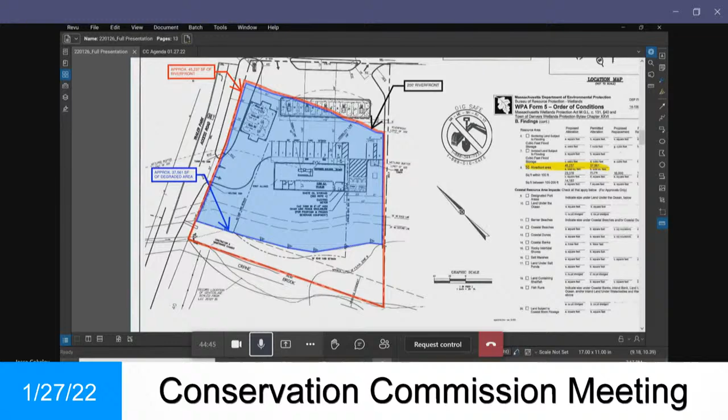The existing as-built plan, the existing conditions, pretty much matches the proposed layout. Building's in the correct spot. The trash enclosure is on the right-hand side of the building. The access drive is where it's supposed to be on Avalon Bay Drive. And the gasoline fuel pump is there.

But what is not there is the fully established plantings that were meant to be maintained. The invasive species have really grown in there. The prior operators were, I guess, dumping some things back here, some debris. It's become a little bit of a garbage area, and we've added a couple photos, which you'll see on the next slide. Photo 1 is from the rear, the southeast corner of the building, looking west, and photo 2 is kind of at the southeast corner of the building, looking south. Just to give the commission a flavor for what's out there.

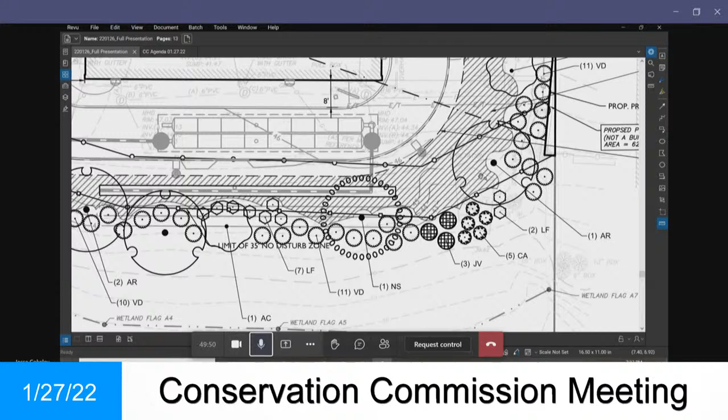Then the next slide that I have is the proposed landscaping plan, which also shows some of the site grading and stormwater improvements. So the improvements that we are proposing, one is to clean up that existing trash and debris. It does require us to go into the 35-foot no-disturb zone and the no-build zone to actually take those asphalt piles out. You can kind of make it out in this corner.

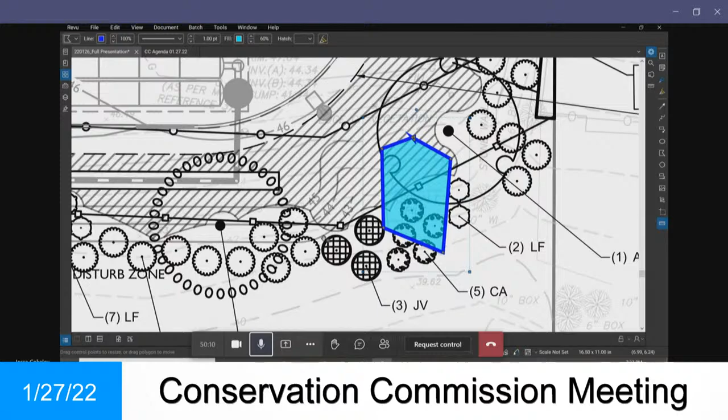So that is the area where the current asphalt pile is. Cleaning that up and then installing the drive-through lane and providing some water quality mitigation as well.

There were some discussions at the original informal appearances we had with the commission about how to best do that. We ended up designing the drive-through lane with a couple of curb breaks along the southern curb, which would allow the water to flow over into a grass area and then into an infiltration trench, which would provide additional water quality benefits. Then it would go into a perforated pipe and into an underground system to mitigate any peak flows, and then tie into the existing stormwater system and discharge at the existing outflow point.

So we're not creating a new source of stormwater discharge. We are maintaining and reducing the flows, and we are providing additional water quality benefits as a result.

Additionally, we'll come back to Kevin to talk about the plantings, but I did want to show the graphic to the board based on the question for that 5.5% disturbance. So here is the same plan, essentially.

We just removed the plantings for clarification's sake, and the colors on here align with the requested legend that is in the Danvers regulations and bylaws for the wetlands.

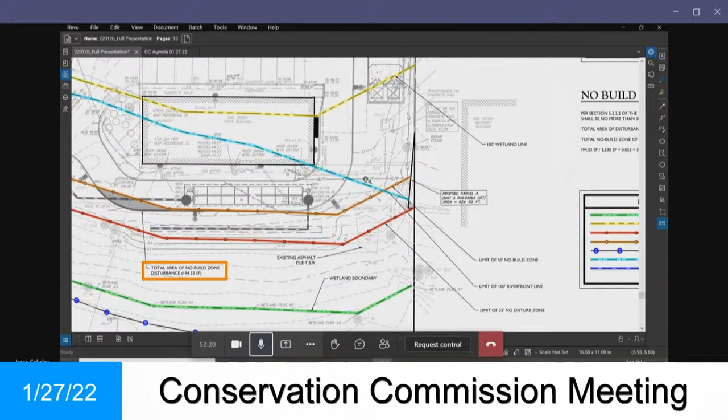We then have the 100 and 200-foot riverfront lines in the two different shades of blue. And the gray hatch here represents the approximately 195 square feet of disturbance in the no build zone.

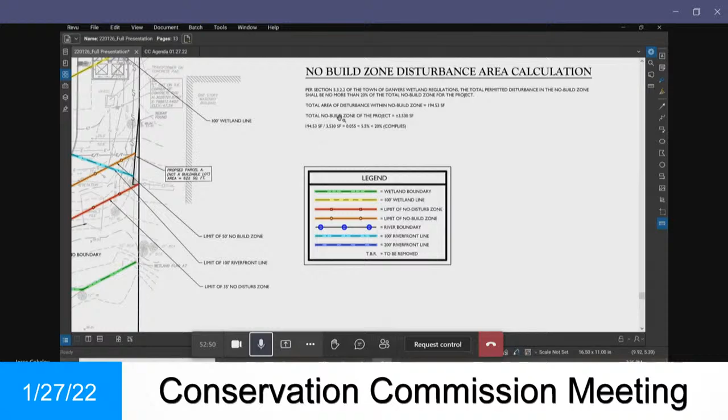We do provide a calculation on the plan. Per the regulations, a waiver can be requested up to 20%. The total no build zone of the project is about 3,500 square feet, so our proposed 195 square feet represents about 5.5% of that area. So that does comply with that total amount of disturbance in the no build zone.

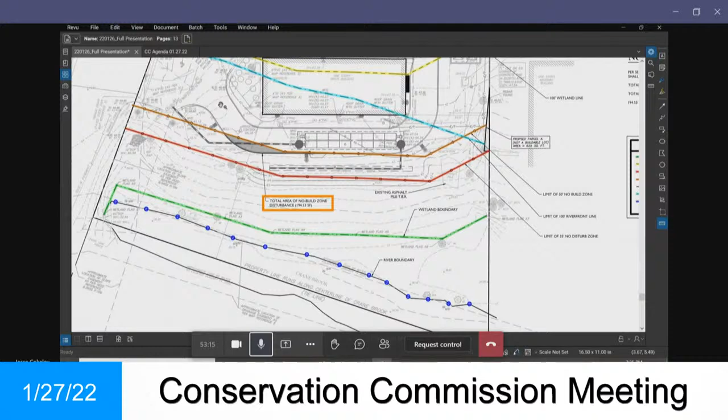So I will go back to the page here with the plantings on our landscape plan. One thing to note is we do provide some seed mix here, and this will be at a mild slope right around the drive-through lane itself. Obviously, we want it to be somewhat flat for water quality purposes up to the infiltration trench. And then we have some proposed grading there, and the plantings we are proposing should also provide some slope stabilization in that area as well.

I'll turn it over to Kevin to talk specifically about the plantings that were selected and their purpose, and the cleanup of the invasives as well.

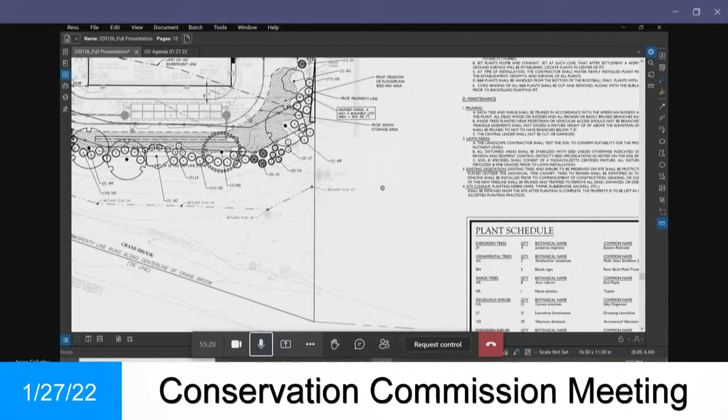There's also a number of native shrubs that will be planted in conjunction with those trees, including 12 silky dogwoods, 31 drooping leucothoe, and 39 arrowwood viburnums, for a total of 82 native shrubs. Also included are some ornamental junipers around the trash enclosure.

So we feel that this naturalistic planting scheme of native plants within the riverfront area is an improvement over an existing degraded condition and also an improvement over what was essentially a failed attempt at restoration in 2006.

This planting scheme and the species provide a number of benefits, basically supporting and enhancing the functions and values intended within a riverfront area. I'll go through a list of those for you.

These plantings will provide benefits to stormwater and water quality through a reduction in runoff rate. They'll promote recharge. The trees will shade the area, as will the shrubs, resulting in a temperature reduction for any stormwater runoff.

The vegetation will filter sediments, and as Jesse indicated before, this is a sloped area leading down to the wetlands, so the plantings will provide good stabilization for that slope.

The plantings also provide wildlife habitat. A number of these species are seed-producing species that'll provide food for wildlife. They'll provide nesting habitat and resting habitat and shelter for a variety of species.

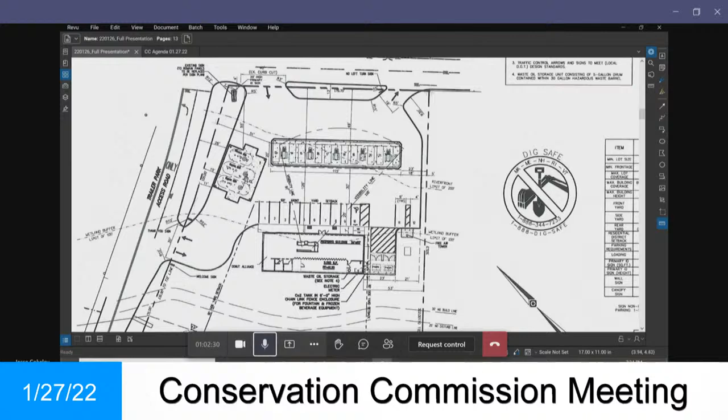I don't know if they actually designated an area in the 2006 plan. I believe it does get deposited on the west side of the building, and potentially along the grassed island on the site. We would still look to use that, but now that we have the drive-through lane and the trash enclosure, we designated that area in the back for them to deposit the snow as the snow storage area. They could still use the grassed island to the west.

And then they could also use some of the area, but that has been landscaped, so we obviously want to respect that. That was also part of the reasoning for, if you see on the landscape plan, there's a white strip behind the curb line. We were giving like 4 or 5 feet off the curb for that as well, and then the landscaping is behind that, so it's not damaged.

I'm not sure about using that area, because then you'll be within the 50 foot - I know it's not building anything, but you're still getting within 50 feet of the wetland. I'd prefer to see that western grass island, and the area behind the trash enclosure really prioritized, instead of putting it south of the drive-through lane. Okay, we can update that. Thank you, that's all I have.

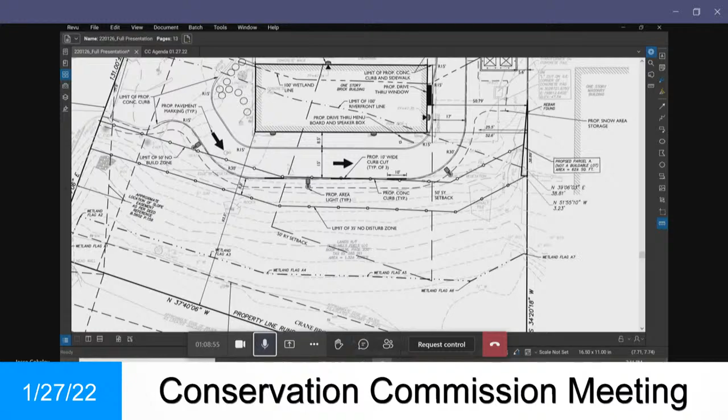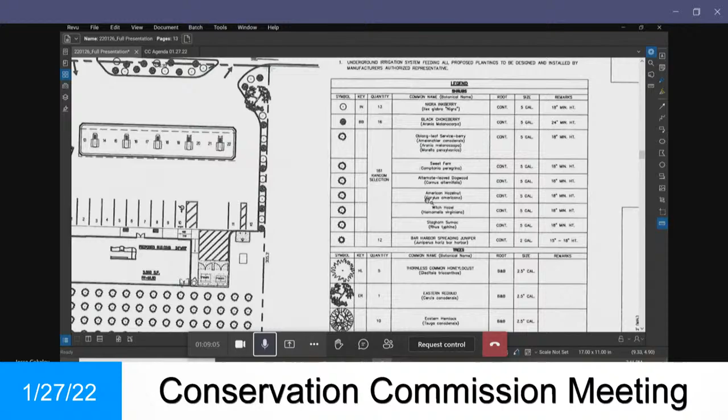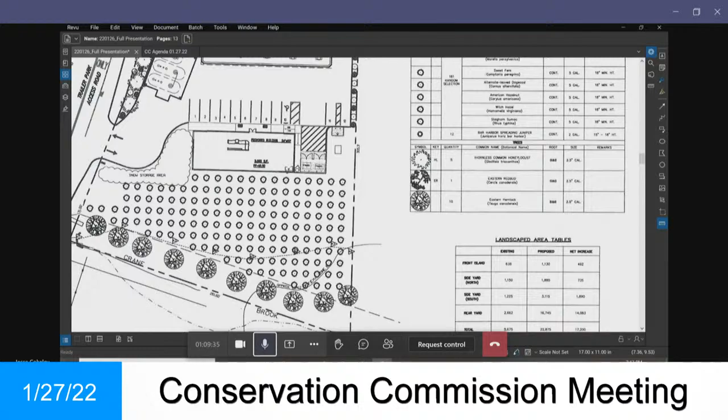If I'm speculating here, traveling back in time, and Kevin can chime in as well, I think it's probably a result of invasive species taking control, and the maintenance not really being adhered to. With what we're proposing, we're trying to avoid that scenario as much as possible. I also looked at some of the tree species they have, and it says random selection, so I don't know if that was truly followed, if substitutes were allowed, or what was actually planted. That could also have an impact. They may have planted them at a bad time of year and they didn't survive, and the guarantee period was up and things were over. It's a host of things that could have happened. I don't know, Kevin, if you have any other theories or have seen anything in your experience.

I would agree, it's speculation, but all those points Jesse highlighted could apply - it could have been the time of year they were planted, or the nursery stock being poor. We don't know if substitutions of species not well suited for this area were made, and we don't know what the maintenance was for these species. We've seen instances of a number of things over the years causing failures. It's just tough to say without going back in time. I could say hemlocks planted in the wetland may not have been a good choice, but it could be a variety of reasons.

Mr. Chairman - yes, go ahead, George. I wanted to note, from a quick review, it looked like a number of the plants they had proposed were more upland plantings. It seems like what Kevin's proposing here is a bit more wetland or facultative wetland derivative plants, and I think that may be more appropriate here. I'd lean more on Kevin since he's the expert, but comparing the types of plants and species, it appears that what you guys have chosen this round, and how it's planted, seems a bit more in line with what's out there now.

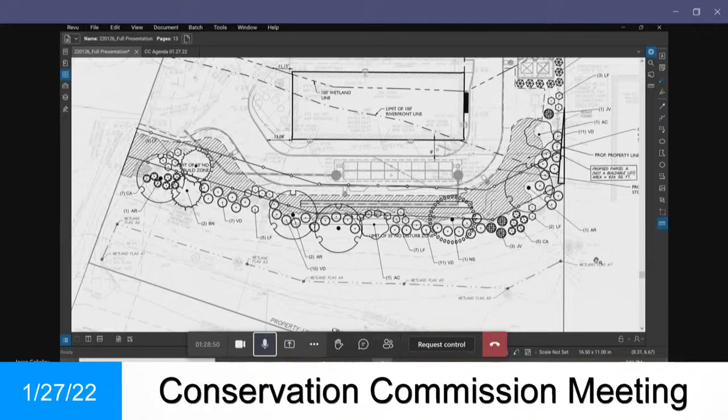Was there anything else that the commission members would like to see for next time? No, just as long as we have a good detailed conversation over the plantings and our degree of confidence that they will prosper or thrive.

Okay, well, thank you very much. We will be back on the 10th. Okay, all right, so if someone can make a motion, we'll continue this hearing until our February the 10th meeting.

I make a motion that we continue the hearing for 160 Andover Street, DEP file number incomplete, but 14-13, for the February 10th meeting. Okay, a motion's been made.

Just a quick question before we proceed. Do we have confidence that there will be a DEP number by then? I would surely hope so. Okay, 'cause we submitted for it prior to the last meeting, about a month ago, so we just don't have it yet. Okay, let's presume that we're going to have it then. And if not, we'll just continue, I guess? Yeah. Okay, so we can give Georgia a heads up before the hearing whether we've got it. Okay, all right, good, thank you.

All right, so the motion has been made. Is there a second? I'll second. All in favor? Aye. Aye. Okay, good enough. So we'll see you at our next meeting.

Thank you very much, Mr. Chairman. Thank you. Next up is a notice of intent for 51-55 Pickering Street, DEP file number 14-1374. The applicant is DCAM Construction Corp.

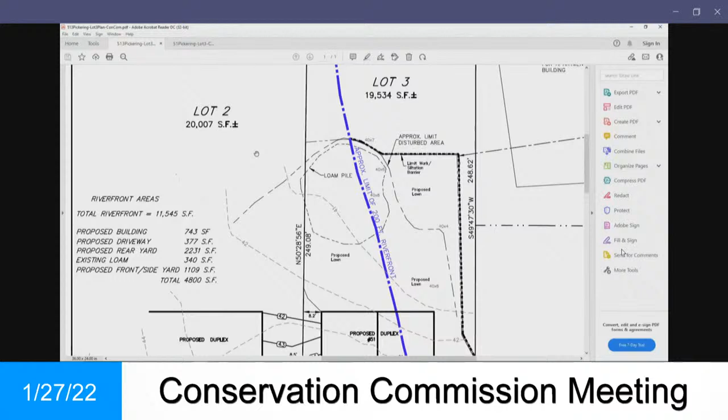Okay, so this is a site that was bought by Cheryl and her brother, and it was divided into 3 lots. They decided to work on lot 3 to start. Without realizing it, we were in the buffer zone to the river, so we filed a notice of intent after construction had already started. The foundation is in out here, some grading has been done, and there's a stockpile of loam back here. I'll go back to the application - we are in the riverfront area.

The lot was created in 2021. Lot 3, each of the lots is about 20,000 square feet. Lot 3 is the only lot that is in the riverfront area, a portion of it. It was very overgrown when we started. In fact, my field guy said he had to wear chaps to go out there because the thorns were so thick, and that's what he did in order for us to do the topo out there.

Well, those thorns are effectively gone now. We located the river from a couple of different local GIS maps to get an approximation of the riverfront area on the lot. We did not want to go onto other people's properties to delineate the riverfront. There's 2 properties that I'll show you in a minute that are immediately adjacent to the river and have significantly more effect on the riverfront there than our proposed lot. Let me go down to those for a minute.

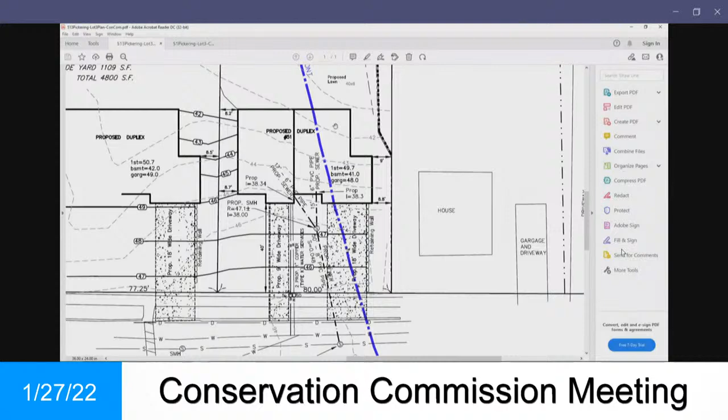So the alternative conclusion was to leave the buildings as it sits. Going back into the plan, we've got zoning 8 feet off the lot line on each side, and we're at minimum zoning on the setback from the street. So we have the 2 duplexes, the 2 driveways, and the utilities in the front, and then the 200-foot riverfront line is the blue line on the plan here. There's going to be a proposed lawn area back here, and I'm limiting that to get the 4,800 square feet because we do need a lawn area in the back. You can see the lot goes back quite a bit further, but that's going to remain undisturbed. This is effectively the limit of the disturbed area now. Where they put the stockpile over here is mostly outside the 200-foot riverfront area.

The bulldozer and the grading and so forth that they had done - I can't remember if I put any pictures in or not - was in that area for the limit of work. No, I did not put any pictures in, but I can share some pictures if you want to see them. So that is about the limit of what we're looking at doing.

And we do have a DEP file number. I don't know if anybody's looked it up. It's 014-1374. So I'll be happy to take any questions.

Okay, thanks. Let me ask the members of the board first, and then I'll follow up with whatever questions are left. Chelsea, do you have any questions?

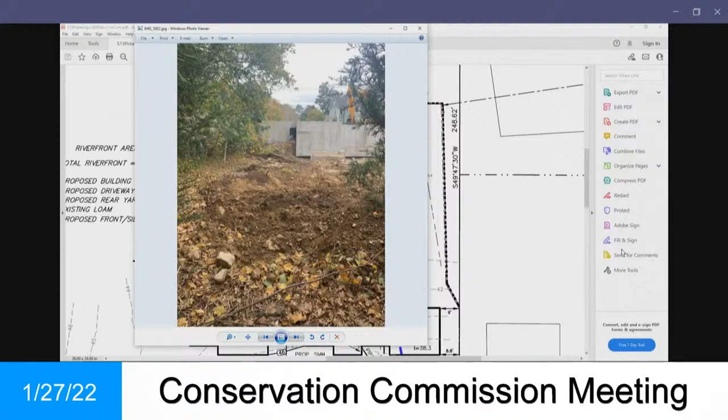Okay, I'm just trying to wrap my mind around how, if they do want to put in the patio and porches, but the disturbance has already taken place, how do we reconcile that? Sorry, do you want me to repeat myself?

If you would - you're blocking, because of the mask, you're blocking away from the line. Sure, I was just trying to figure out how to reconcile, because the house has been built, the yard has been cleared. If they need to add additional square footage for the patio, but the other work has already been done, how can we reconcile that?

Georgia, do you have any insight? Well, Cheryl could show it on the plan for what they want to do and then come back, and then the commission approves it. That's the cleanest, easiest way to do it. She could come back with an amendment. Depending on how far it is, there are a lot of avenues.

The new homeowners could come in for a minor project permit potentially. But I would say if you're here and you already have the site open and altered, it would be to your advantage to add what you're doing onto the plan, and that way it's all official and approved. And if you've already shown it on your building plans - it sounds like that's what you intend on doing - then the commission would definitely need to see it on their plans.

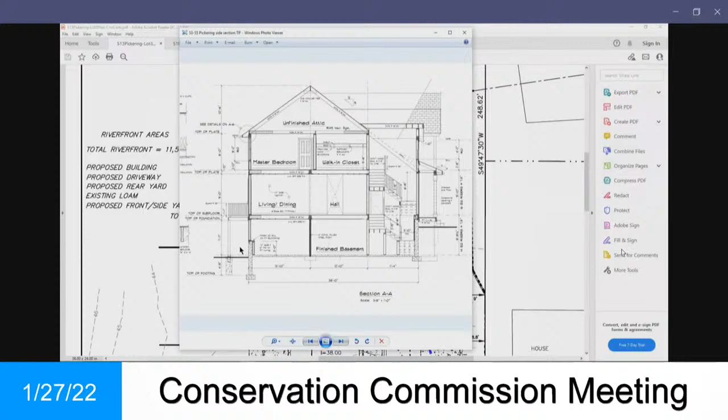But future owners, it's a walkout basement, is that correct? That is correct. So in all likelihood, they're probably going to want to build some sort of patio or something there. So either you're going to ask for permission now, or the new owners are going to have to come in and go through this whole process again. Seems to me, if you made some provisions for it in your plans, it just takes a little encumbrance off of the homeowner when they buy the house.

And I just have two other questions. I'm just asking this rhetorically because I think I've already seen it, but nothing else in your project area where your 3 lots falls within the 200 riverfront jurisdiction, is that correct?

That is correct. Okay, my next question is probably for staff as much as for anyone. Does the building inspector, when he grants a building permit, have any kind of overlay that flags this as questionable around the 200 foot mark? Yeah, so the town of Danvers does not have a state-of-the-art permitting system where he puts in an address and it puts a red flag that says near a wetland, call Conservation Commission.

The town's historically just operated based on knowledge, and on this one, similar to the issue the applicant had stated, they were not aware it was in the riverfront area, given the separation from the house and the multi-unit apartment. But Jim Butler, the building inspector, and I are in constant communication. And when you've worked here long enough, you definitely know Woodvale - that's an obvious situation where most likely you're going to be pinged for Conservation Commission. But there are some scenarios like this that wouldn't necessarily be on even my radar. So simple answer, no, there's nothing.

Okay, because a month or two ago you sent us that river map, it would seem to me that we could make some kind of overlay over that. He has GIS, and he uses Mass GIS and Oliver, so I do want to preface that he puts that in, but it's not every single address for every single building permit. It's the same way we don't necessarily check all our Conservation Commission things for zoning compliance, so it's a working process.